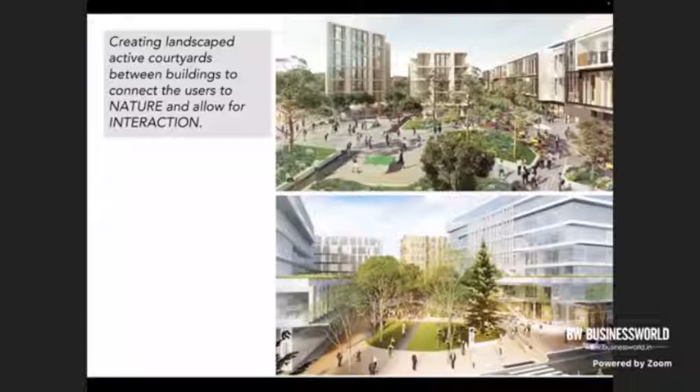We crave interaction with nature as human beings, but we also crave interaction with each other. Wouldn't it be wonderful to have cities where you have buildings but also courtyards in which people can meet - not courtyards like these, which because of their design have no corridors and are essentially dead. There's a big difference in how courtyards need to be designed.

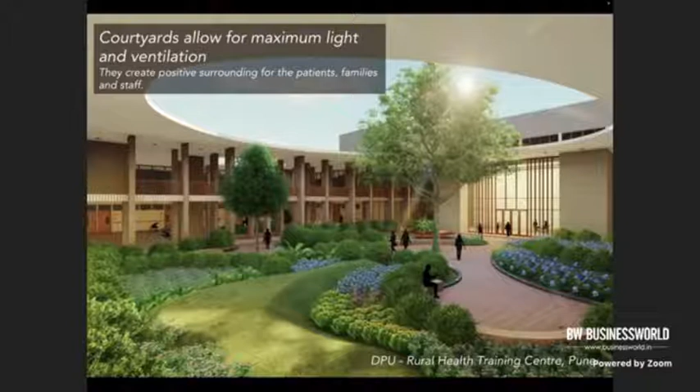Biophilic architecture is really a new buzzword, and introducing plants and nature into our buildings as much as possible is definitely a new trend. This is a rural hospital we're doing outside Pune - it's just so calming when you enter. New trends like vertical farming, rooftop farming, and city farming parks show that bringing nature into cities is something we really need to do.

Let's first understand this issue of density - what does it mean, and what is an ideal density? Mumbai has a density of 32,000 people, but across the world there are different densities. What we found is that a density of about 10,000 people per square kilometer is something that really works.

If you take all the people in Maharashtra, including those who will move into cities in the next 30 years - about 78 million people - you need only 2.4% of the land, meaning there's more than enough land in the state to accommodate everybody well. If you see how our land is used: forest is 20%, fallow land 8%, unutilized 30%, pasture land about 17%, and urban areas already 4.3%. So we already have almost double the land urbanized from what we need.

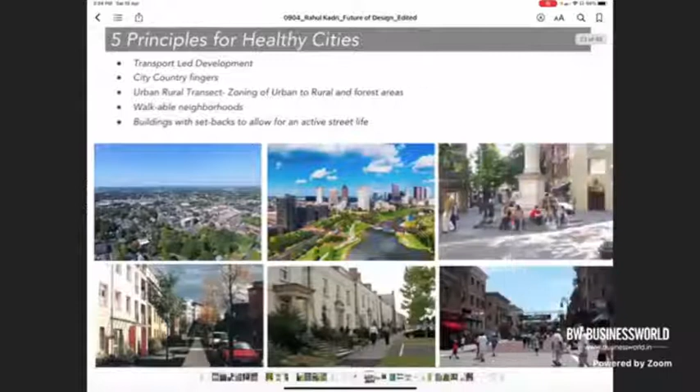So where are things going wrong? My hypothesis is that it's really about planning - how the city is used and planned for. So the five principles I'd like to introduce for healthy cities, so they connect us to nature and to humans, are: first, having transport-led development.

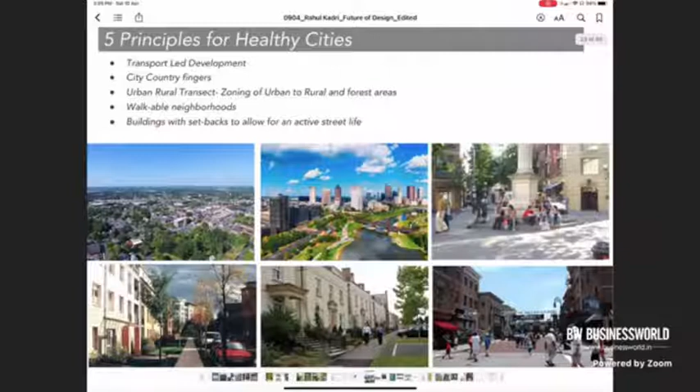Second, having city and country fingers, where the country and the city join like fingers together, but having an urban rural transect with a range of typologies in a city. Coming down to the neighborhood level, making it walkable, and then how the edge of the building is designed is important. We all know transportation is an issue, and public transportation is really the key.

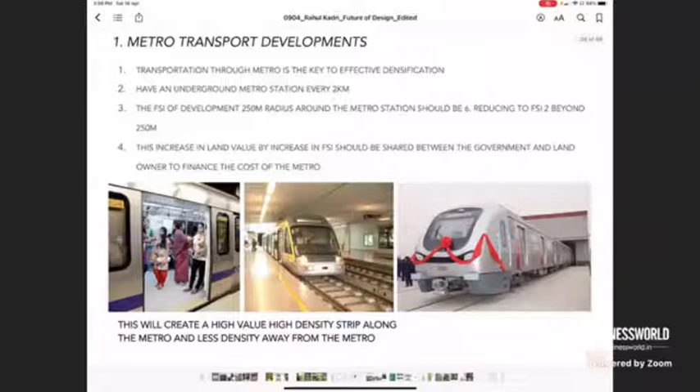Focusing money on private transportation will never work - you can never solve the traffic problem that way. No country in the world has solved the traffic problem even by spending billions of dollars. But you can solve it through public transportation. I think metros and bus rapid transportation, BRT buses as well, are key answers to this. So investing in public transportation is one of the key things in making a city more livable and freeing up space to be used otherwise.

If we use this to plan our cities, rather than the way we do it now where there's the same FSI everywhere, we should have an FSI of 6 or higher right in the urban core. Then as you go out from the urban center through general, urban, rural zone, agriculture, to the natural reserve, the FSI should go down to zero.

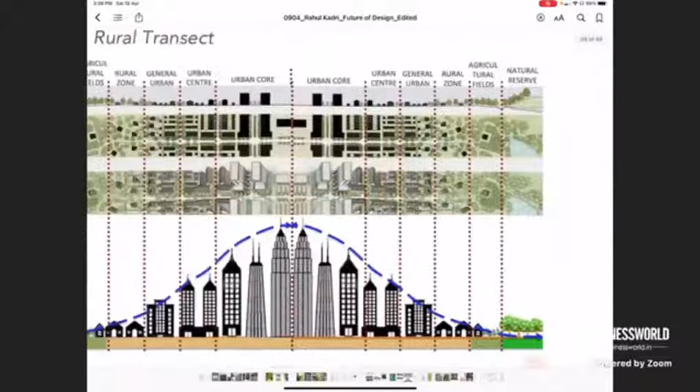So you just need an FSI of 0.9 on average, but it's on a sliding scale. That's one of the key things we need to have variation. Our neighborhoods need to be compact so that we can walk, and land use needs to change too.

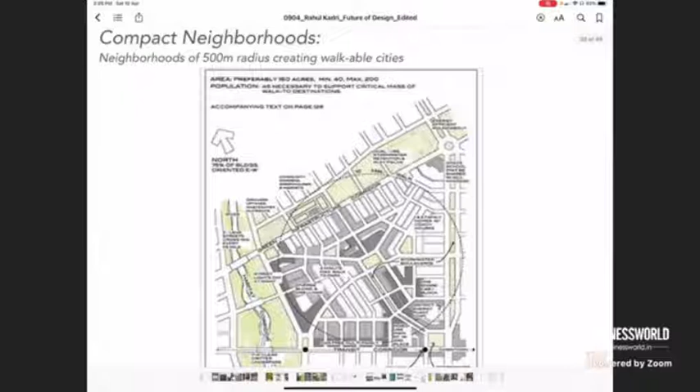So far, the land use plan of cities for the last 30 years has been: this is a residential zone, that over there is an office zone, that's an industrial zone, and that's a retail zone. That needs to change. It needs to become mixed use so that you can walk to work, walk to school, and you don't have to commute long distances.

It should all be available within a 15-minute walking distance. And we need our blocks, which can house up to 200 or 300 families with a common playground, car parking, etc. So you have a block of, say, 60 meters by 90 meters, or 90 meters by 120 meters, and this is where people live.

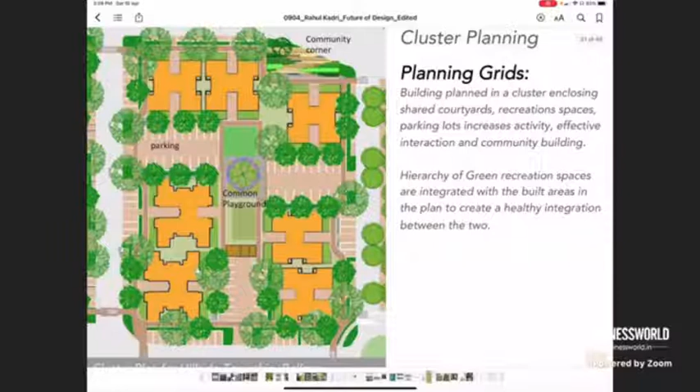So something like this. This can be one urban block, and we can vary the height, but it becomes a self-sufficient block with lots of green space within it, and the street network is such that social spaces are available at the junctions.

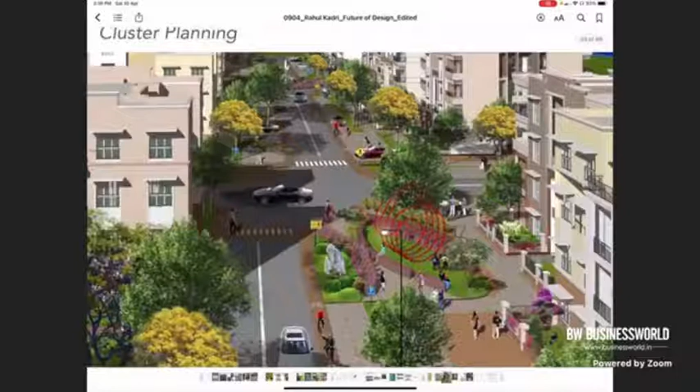As you can see in the image, there's much more space given to the pedestrian and the cyclist, and much less space for the car, which is not allowed to go straight through. The car is slowed down in the city.

Lots of street space can be reclaimed if a lot of the mass movement is happening underground.

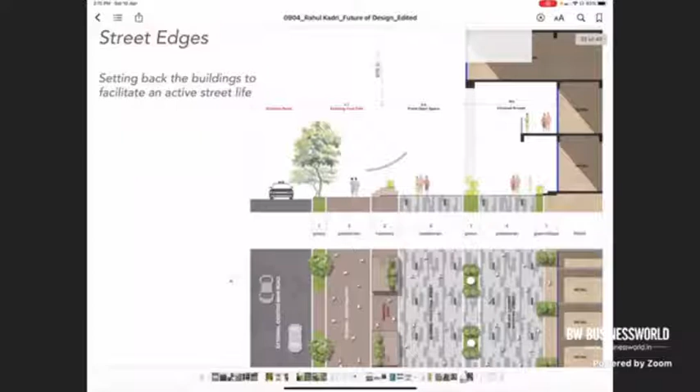The edges of buildings—I think we make a big mistake in India with a simple thing: when we have roads and buildings, we have something called the front open space. That front open space needs to become a public space so that the building forms the edge of the road, and not an amorphous space between the road and the building. We waste almost 10% of our urban space in that front open space because our buildings aren't on the edge.

This is what I mean by having the building on the edge. So you can create tremendous character. This is a pedestrian street, but if you have uses at the edge, it changes the character of the street completely.

And lastly, we need to build on successes rather than trying to build new cities. Old, existing cities have jobs, a network of friends and relatives, schools, and infrastructure. So we need to upgrade the cities rather than looking to build new ones.

Having said that, if we were to aim at building 100 smart cities in India, or a lakh amazing smart towns, we need to analyze which towns we really need to grow based on the density.

We've done a study on this, and there are certain towns where the density is already too high, and you should not focus on those. You should instead use parameters like natural features, rainfall, favorable terrain, rivers, making sure it's drought free, accessibility, how much forest area is nearby, and the economic potential.

By doing that, we found that these 9 cities are the ones Maharashtra should really focus on and grow, because they have the potential based on all these parameters and the densities are fairly low: Nagpur, Wardha, Jalgaon, Pune, Kolhapur, Ratnagiri, Aurangabad, Kamptee and Nashik.

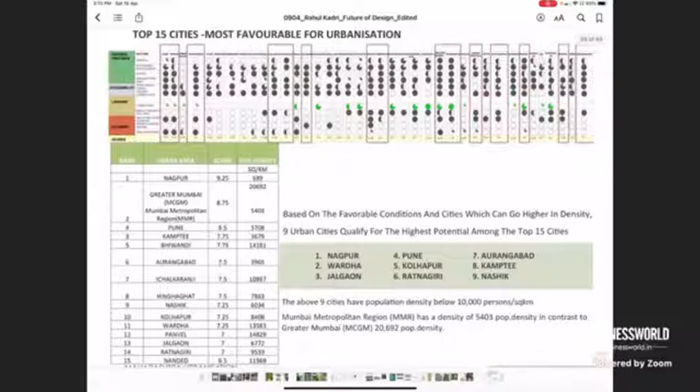These are the ones we should focus on, and we should defocus on Mumbai and the greater Mumbai region, only because the density there is getting extremely high, and getting simple things like water and recycling our sewage becomes almost impossible because of how much is produced.

That's what I have for this morning. Thank you all so much.